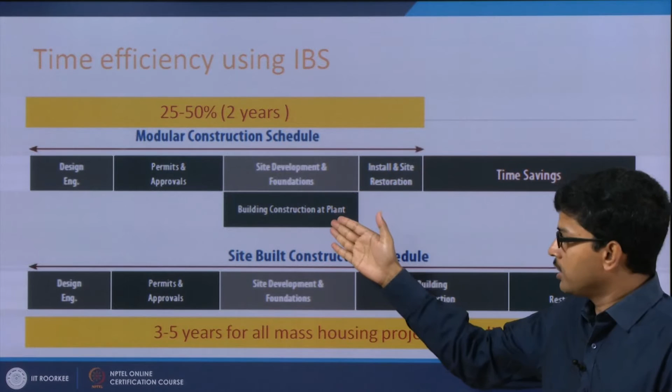This picture we saw last day also, that in any typical modular construction schedule, there is time saving because of the off-site construction activity. The site-built construction activity is reduced, and that construction is instead done at the plant. Now we will see the case study of how the industrialized building system in India is available and how much it can be applicable.

Before I show this example and case study, let me tell you that in government laboratories like CBRI, BMTPC or HUDCO, there were a lot of experiments. They developed, along with Hindustan Prefab Limited, very innovative building components and building materials, and those were tested and worked very nicely in some contexts. But here the examples we have taken will show how at a mass scale, in thousands of units, housing can be developed using these building components in the Indian context. That we will see in the next example.

The example we have taken is MHADA, Maharashtra Housing and Area Development Authority, and they have tied up with another private company, a manufacturer of innovative building materials called Shirke. This partnership between Shirke and MHADA takes up most of the affordable housing and housing for the poor across the whole state of Maharashtra, especially in Mumbai and major cities.

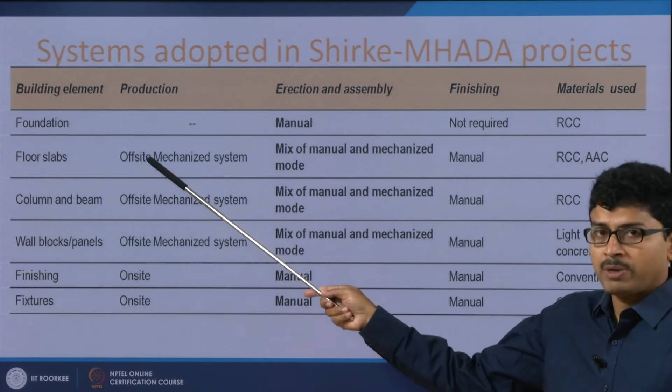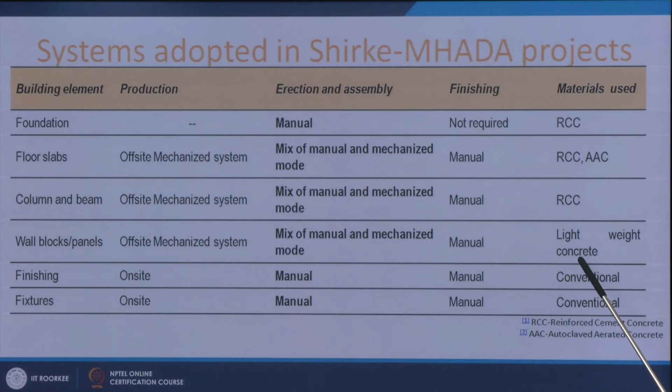The materials used for every component of the house, like foundation, floor slab, columns and beams, wall blocks, finishing and fixtures - for floor slab to wall blocks, they use an offsite mechanized system with blocks like reinforced cement concrete block or autoclaved aerated concrete block. Similarly, they use lightweight concrete or AAC block, whereas the foundation is done manually and RCC is done on site. The finishing and fixtures are also done on site.

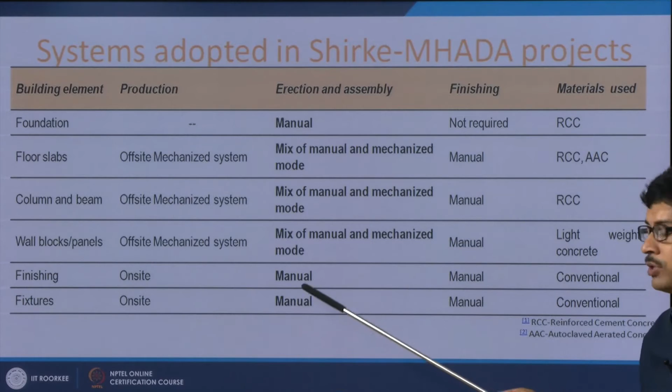So apart from floor slabs, column beams and wall blocks, the foundation and finishing and fixtures are done on site, using mostly a mix of manual and mechanized modes for floor slabs, column beam and wall blocks. Since foundation and finishing and fixtures take place on site, these three activities are essentially by and large a manual process.

To illustrate this, we have taken three different cases, different projects at different locations like Mankhurd, Pratiksha Nagar and Mazgaon in the city of Mumbai. One project will show construction under way, another will show a project completed in the last 5 years, and another will show one completed more than 20 years ago, so that we can understand its quality, durability and performance as a building and housing typology.

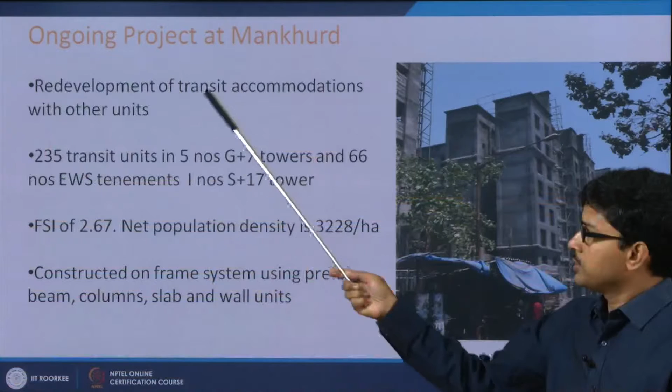This is an ongoing project at Mankhurd - basically a redevelopment of transit accommodations done by MHADA. It consists of 235 transit units in 5 numbers of G+7 buildings, and 66 EWS units with stilt plus 17 storeys high. They have used an FSI of 2.67, and the density is above 3000 per hectare.

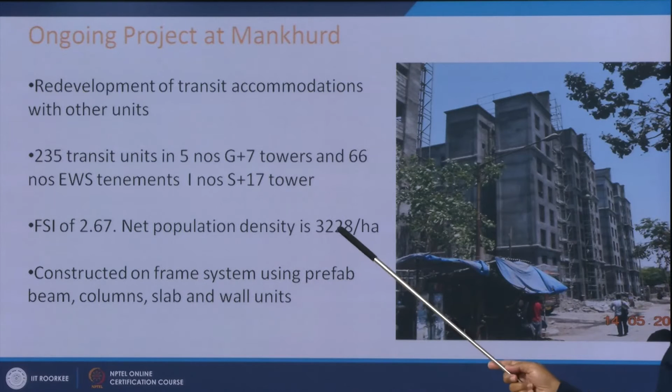Those coming from a planning or architecture background can understand that this density is quite high in the Indian context. In major cities, the net density calculated for a particular plot is typically around 1000 or 1500 maximum, but here they could achieve more than 3000.

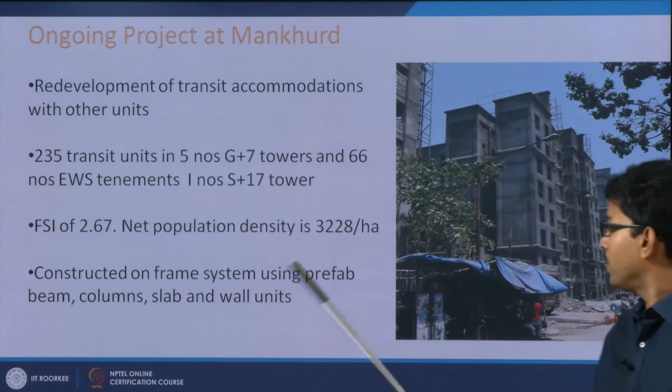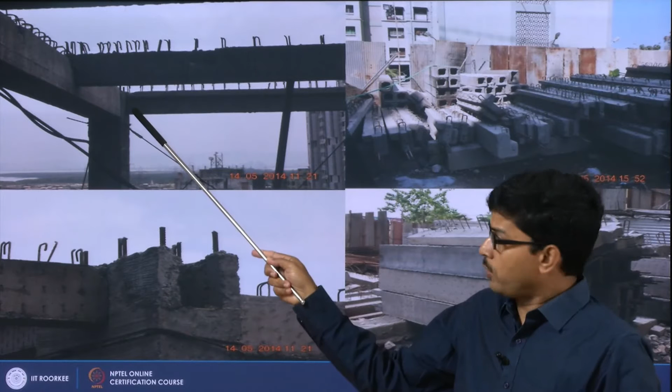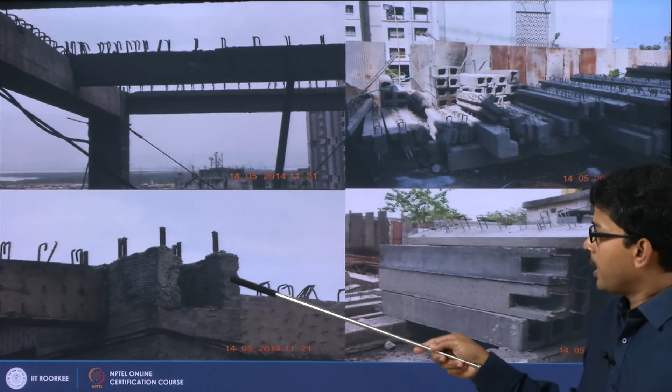They have constructed this on a frame system using prefab beam, column, slab and wall units. I will show how they have constructed it - you can see how the columns and beams are joined here. This is the typical joint of a column, showing the socket where a particular beam will be placed and fixed suitably.

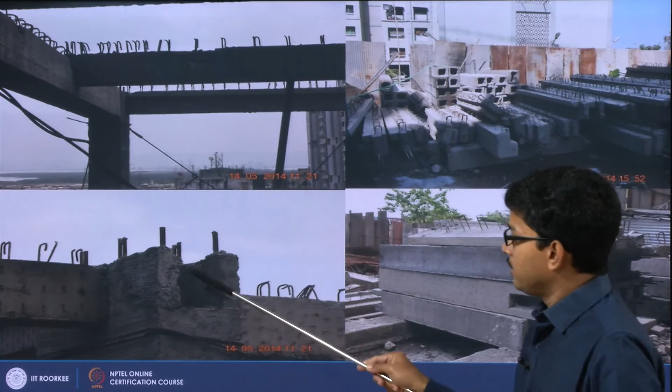These are pictures showing the column units. Column units have a hole throughout the column length, and it is inserted vertically like this, so that sockets are available for placing the beams. These are some of the beam elements, and over the beam you can see some anchoring elements where the slab element will be put and anchored. I will show the picture so you can understand well.

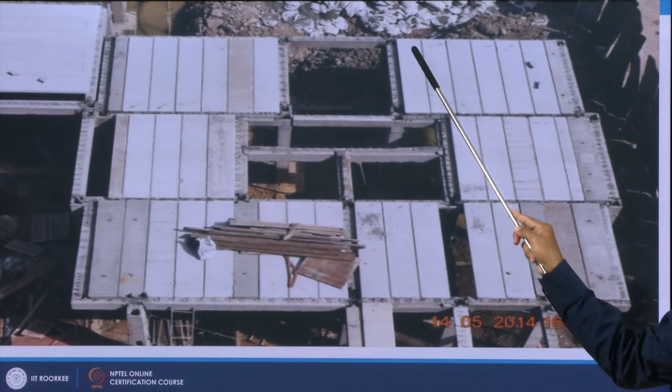After placement of the columns and beams like this, they place the slab element. All the slab elements are treated as independent prefabricated components - some consisting of RCC elements, some of cellular concrete block, which is autoclaved aerated concrete, completely manufactured in their own Shirke factory. They transport all these materials and put them in this manner. After placement of the slab component, they fill up the slab.

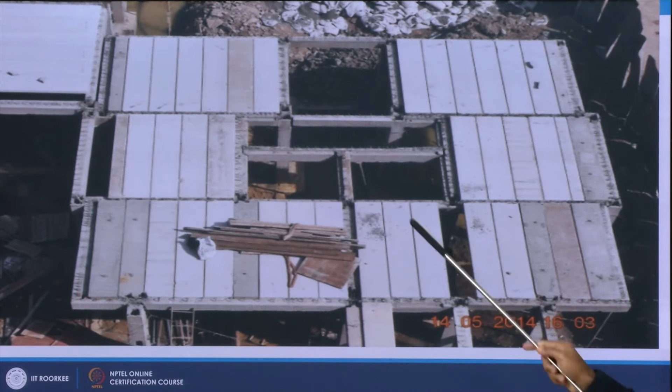They fill the slab over a screed concrete of 3 to 4 inches, and pour concrete into the holes of the column. So the whole column, beam and slab become fixed and more stable, and all the individual components become one integrated, strong component as a whole.

After putting the screed concrete over the slab, it becomes a complete strong floor. The whole process of placing columns, beams, slabs and screed concrete takes not more than 8 to 10 days, as I learned from field visits conducted in the last 1 or 2 years at various MHADA housing project sites. So this floor-to-floor cycle takes not more than 8 to 10 days, though it can take a little longer depending on weather, but technically it should not take more than 8 to 10 days.

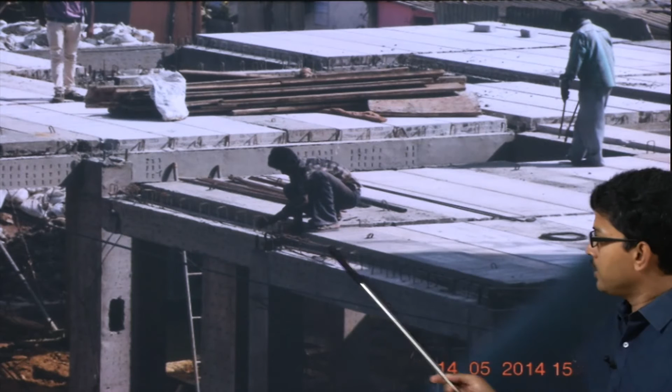So, here you can see how a manual lever is used for fine tuning of the slab component and anchoring the slab component with the anchors and the stirrups left over the beam component. After this fine tuning of the slab component, the screed concrete will be put. You can see the typical pictures of the slab component.

Every slab component has grooves like that, so that after placement of the slab component, it can act like one solid unified component as a slab, and so that it also binds well, it is locked well with each other like this. This is the picture of the whole floor, a typical floor.

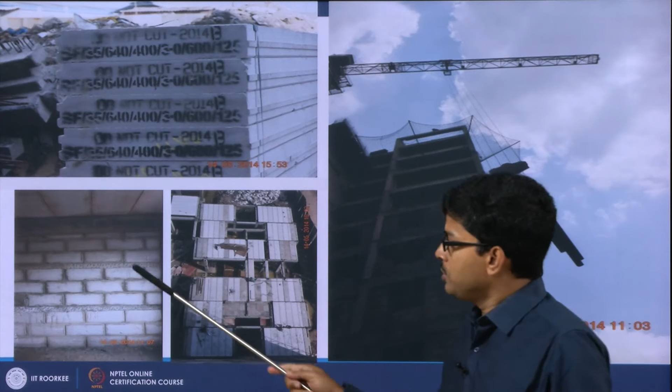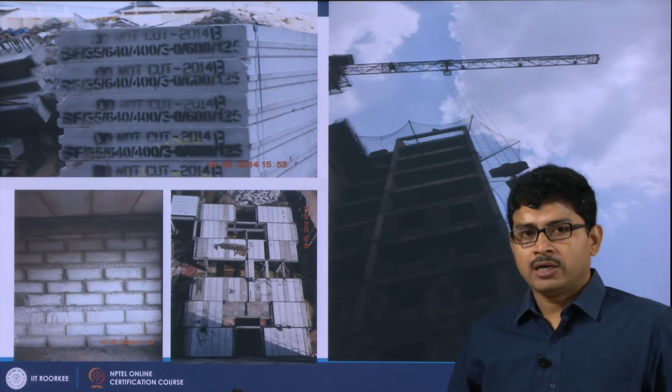This is how they are lifting any prefabricated component using cranes, and this is a typical picture of a wall component where they are using the AAC block, which we call a lightweight block, as a wall component. Also they use the concrete binder so that it becomes stronger and unified, and these blocks are very lightweight, a single person can carry them,

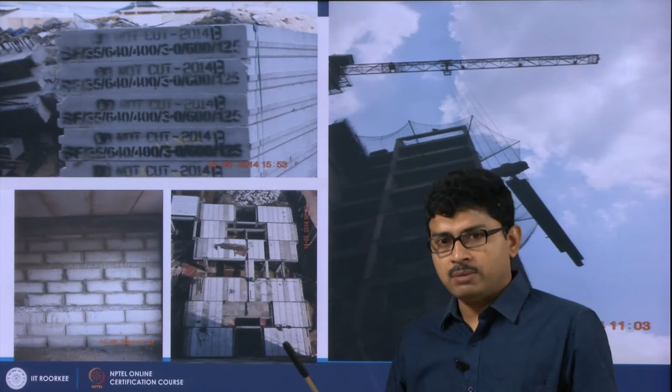and it is also very soft, so that someone can make a groove, or break it and use it like a common brick, but it is manufactured in a standardized dimension, and practically you do not need to cut AAC blocks too many times, so that you reduce the time requirement for the project construction.

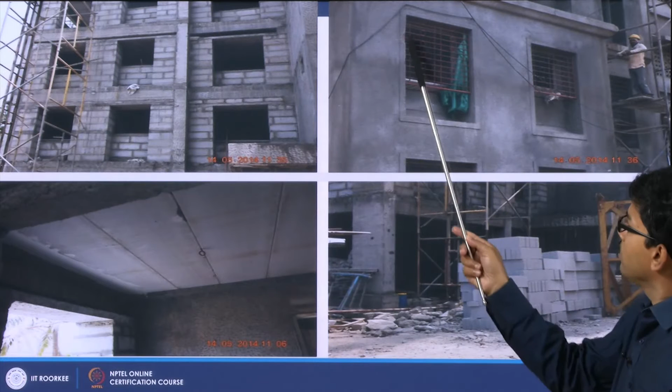Now, in this picture you can see some of the AAC blocks stacked at this site. These are the window blocks. These window blocks are also prefabricated, sometimes at the factory, sometimes at the site, and placed like that. And these are the AAC block walls, how they look from the outside, and you can see the slab component. The photograph is taken at the floor level, so that you can understand the joinery and the arrangement for the ceiling fan kept here.

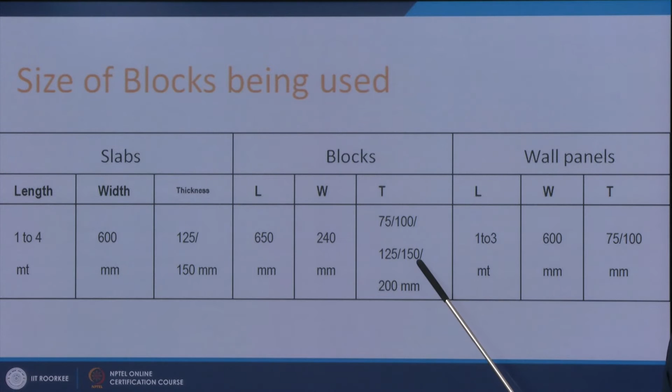So, they use the slabs, blocks and wall panels in this size. Almost 600 millimeter is the standard module size they use, and for the blocks they use a 4 inch, 3 inch, 5 inch or 6 inch module. The length can be 1 to 4 meter for the slabs, 650 for the wall blocks, and for wall panels it is 1 to 3 meter. So, keeping the thickness as 3 to 5 inch and the width as 2 feet, they can go for 1 to 4 meter and 3 meter.

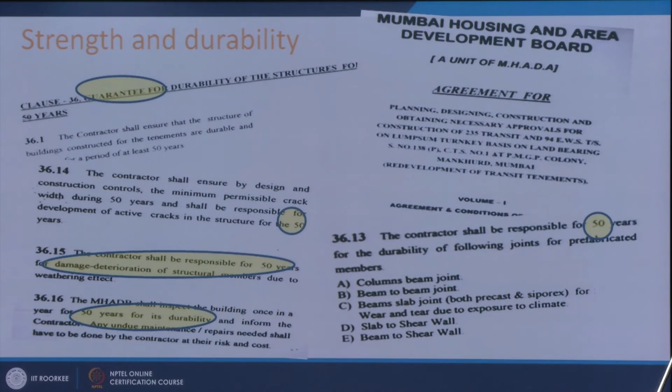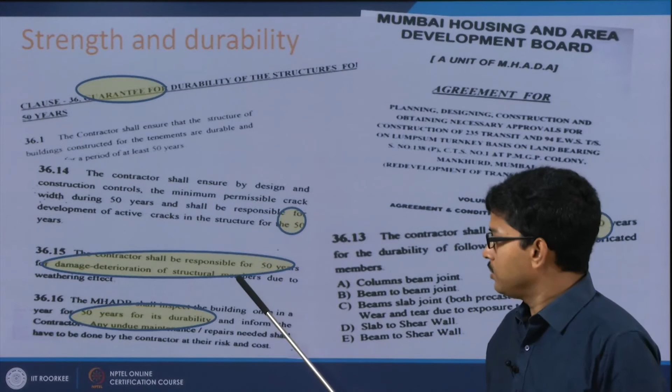Now, let us talk about its strength and durability. The whole structure is designed to give a life cycle of at least 50 years for durability and strength against all possible loads in the building, and they have vetted the design with the help of IIT Bombay. These are some of the clauses in the contract between the developer or manufacturer and the government housing board authority, where they have given a guarantee of durability and strength for at least 50 years. And it is still working for more than 20 years. This particular project was under construction.

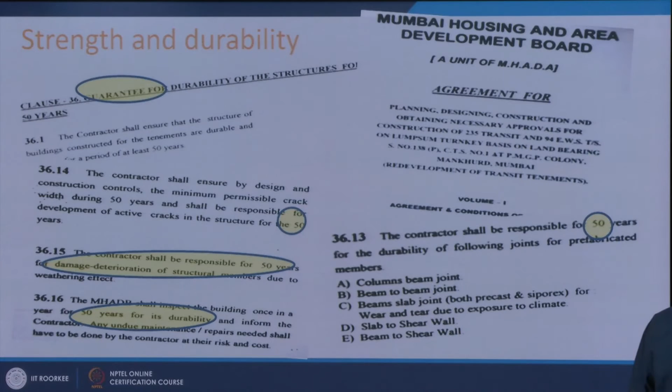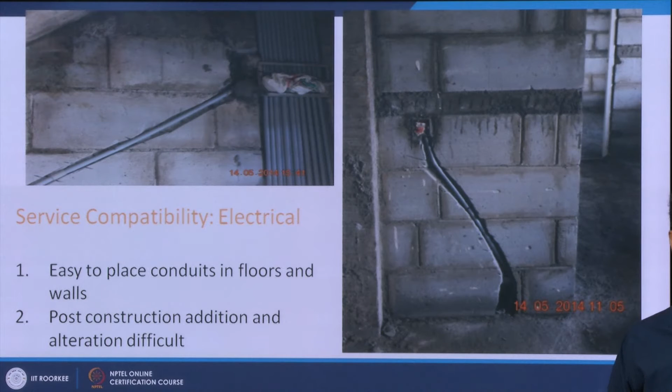Now, this is the arrangement of how they put the conduits for the electrical pipelines. Usually in normal RCC construction we place the electrical conduits in the roof slab during casting, but here, during the screed concreting over the prefabricated slab component, they take the conduits in the screed concrete, and from there a conduit goes up to the switchboard level, whereas in conventional construction it is taken from the ceiling. So, that is the difference.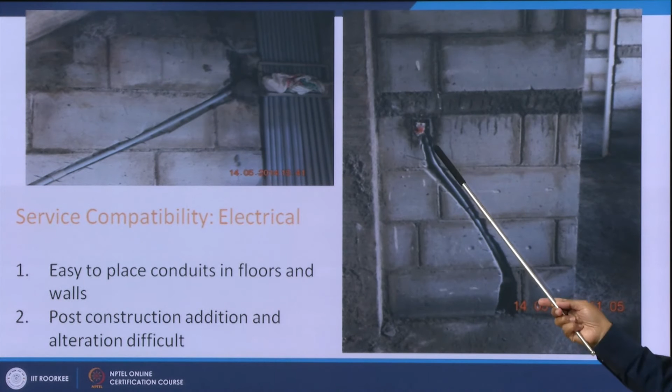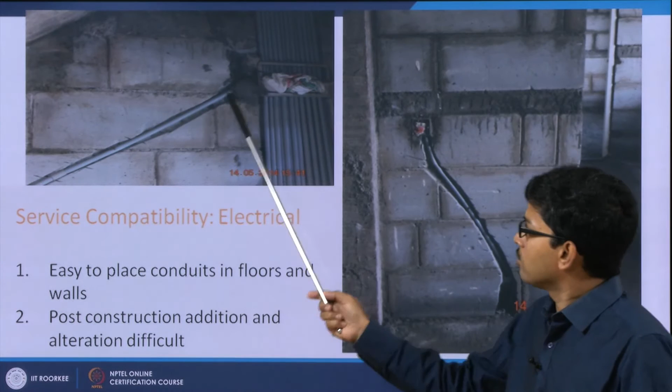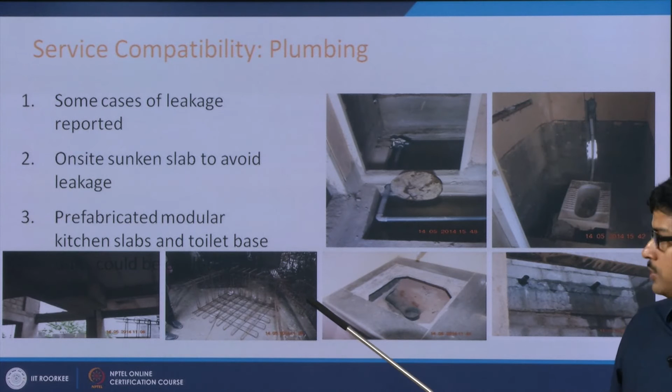Another point is that it is very easily cut by even semi-skilled labor, so that they can make space for the conduit like this. These are the exposed conduits. These are some pictures showing how the plumbing arrangements and outlets are done, and some drop slabs which are done in situ. Those could be a next stage of improvement, but these are the areas where it is working very nicely as a product, as a design.

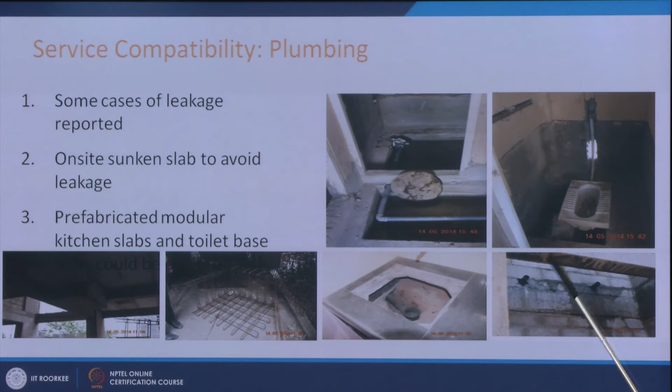These are the pictures which are under construction. Now, we will see some of the projects which are already constructed to appraise or to assess their efficacy against the performance. Now, this project, the New Hindu Mills project, is in Mazgaon.

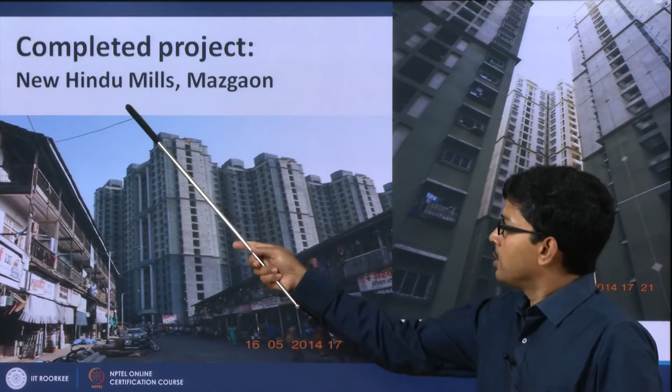Now, in Mumbai, you know that there are many mill lands. So, the authority or the government of Maharashtra took a policy to use those mill lands for affordable housing projects. So, this is one of the biggest mill land housing called New Hindu Mills. Basically, it is a combination of a few mill land housing, where they have placed also the original staff of the mills, some transit accommodation, and a few EWS and LIG population.

You can see the adjoining area is full of a kind of slum-like situation, and this is the housing project which we are discussing. So far 18 housing projects in the mill land were already executed, more than 10,000 units, till 2014 when we took this study. So, the New Hindu Mill project is the largest, having more than 5,000 units. It is one of the biggest projects.

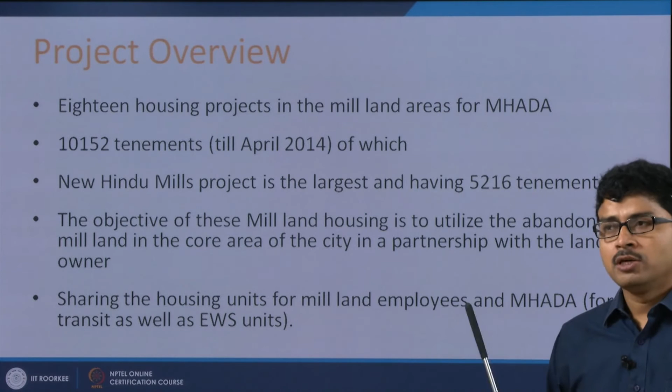So, the objective of this mill land housing is to utilize the abandoned mill land in the core area of the city in a partnership with the landowner, and sharing of the housing units for mill land employees and MHADA for transit as well as EWS units, as I told. So, for redevelopment of the other projects, other slums, some transit houses will be required. So, those transit houses will be accommodated in this project. That was one of the objectives.

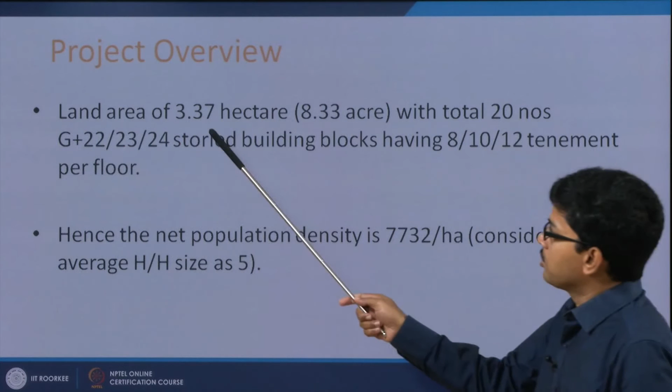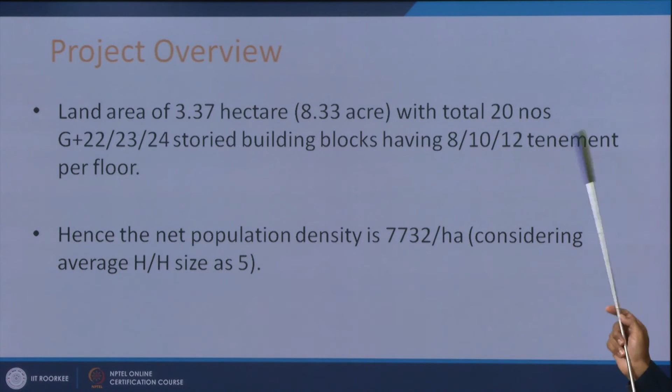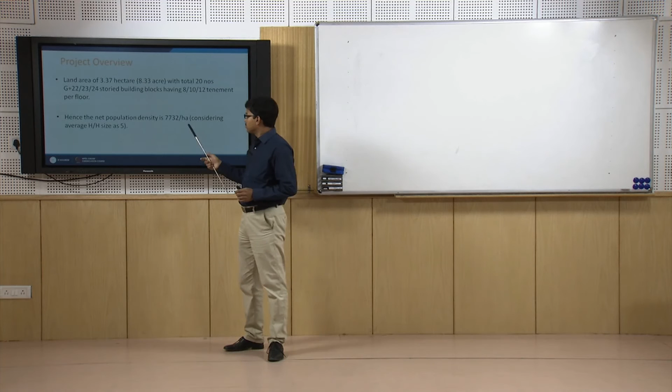So you can see the land area was more than 3 hectares, 3.37 hectares, and it was full of G plus 22, 23, 24 storied blocks having 8 to 12 tenements per floor, and you can see the density. It is a very high density project with a compact development, but with this density at least the housing units are affordable for the poor, the lower income group or economically weaker section. Otherwise it is not affordable.

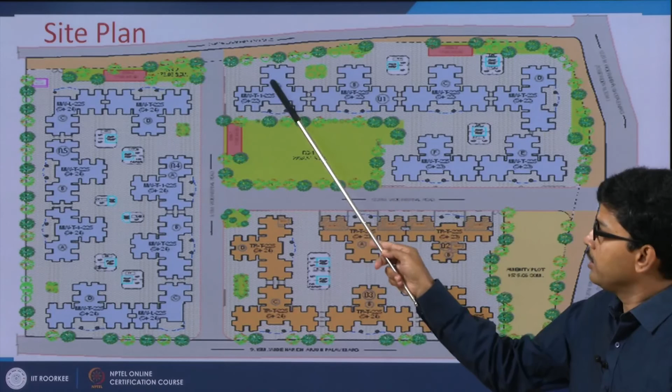You can see the layout plan. In the layout plan, the building blocks are joined together in such a way that they make internal courtyards for enough light and ventilation, and you can see the typical building unit is repetitive, because we talked last day also that the whole industrialized or prefabricated process runs on standardized design, standardized modules. So each housing unit consists of a standardized module. We will see one such module in detail in the next slide.

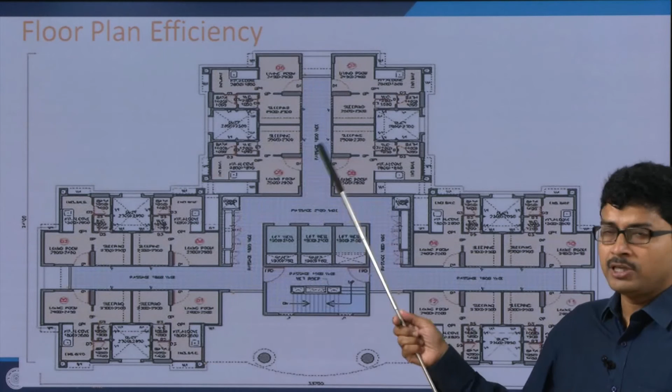So this is a standardized module of a typical building block. It consists of 12 units. This is one unit consisting of one multi-purpose room or living room, one bedroom, one WC and one bath area and one kitchenette with some storage area, and this is the common core with staircase and lift block, whereas these are the common lobbies to provide access to each and every unit. So this is the standardized module which they use.

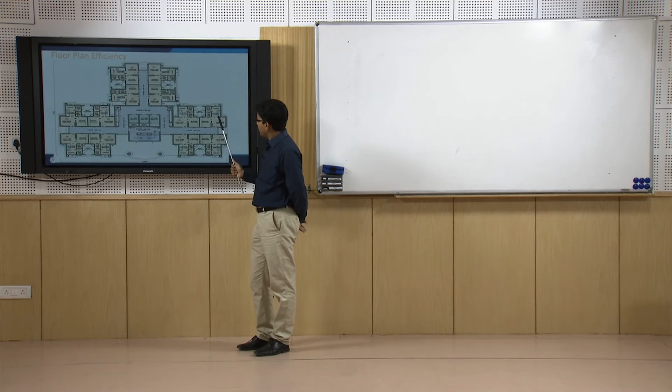Out of this module, components like the lift shaft, lift core and the staircase core are done in situ using RCC basically, and some elements like bigger columns are also RCC, but apart from that most of the elements are done with prefabricated wall blocks and prefabricated components.

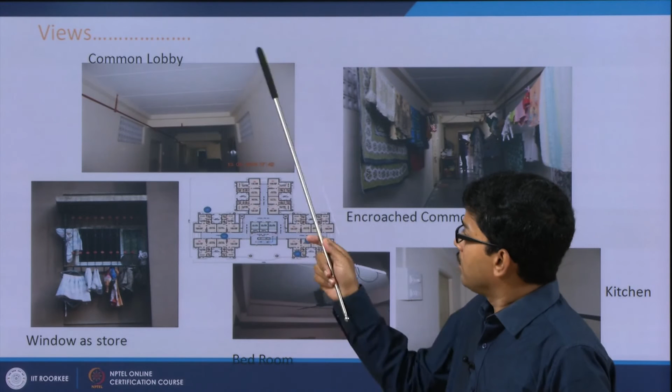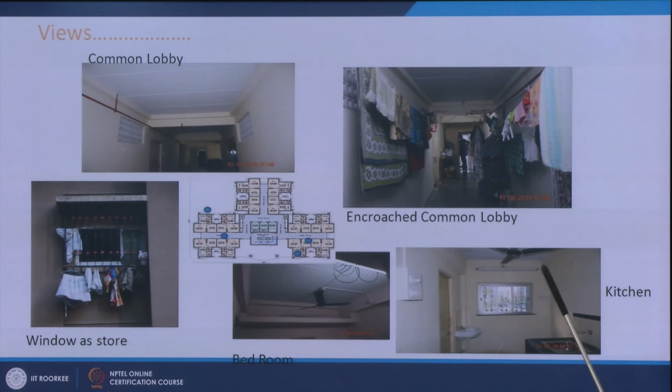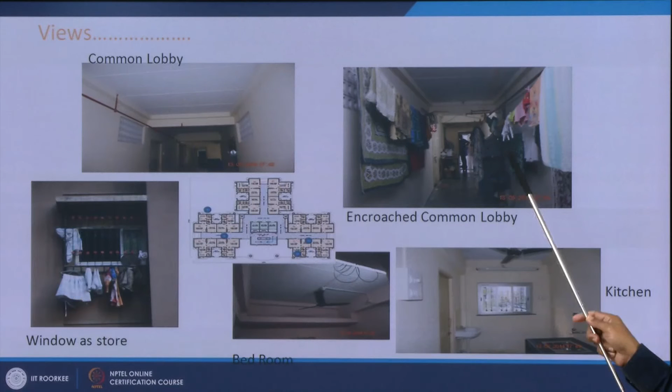This is the picture of a finished floor, where you can see the placement of the slab component from the bottom. It is painted in colors, and this is the picture of the typical kitchen, where you can see the kitchen slab and the slab component. Only one thing: since this particular design does not have any balcony as such, they are using the windows for their day-to-day storage, or in a few cases we have also found that they have used the lobbies for keeping their day-to-day things.

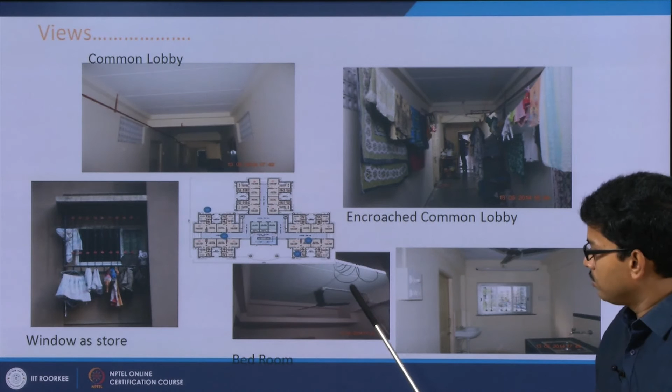And this is the picture taken from inside, where you can see the internal arrangement of the slabs and how they have taken the electrical pipelines, which are basically exposed. So these are the variations and the outcome of the project. This is the typical unit plan having one living room, one bedroom, kitchen, WC and one bath.

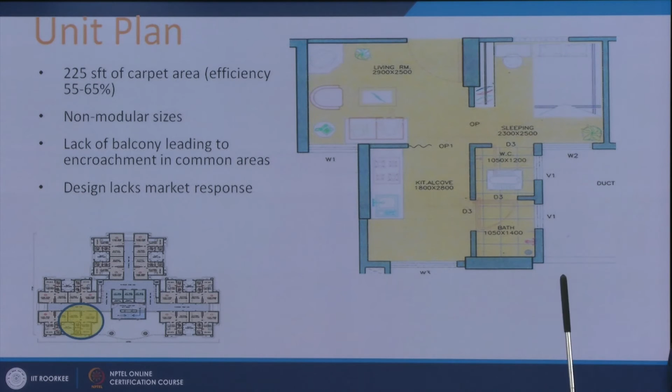Now, this is a very compact design within 225 square feet of carpet area. The only thing is that it could have accommodated another very small balcony, so that people could use it in a multi-purpose way. Other than that, it is a very nice design to generate affordable houses within this price and within this much time.

So these are the general views of the project. You can see it is a huge project. This is the view from the inside courtyard of the project.

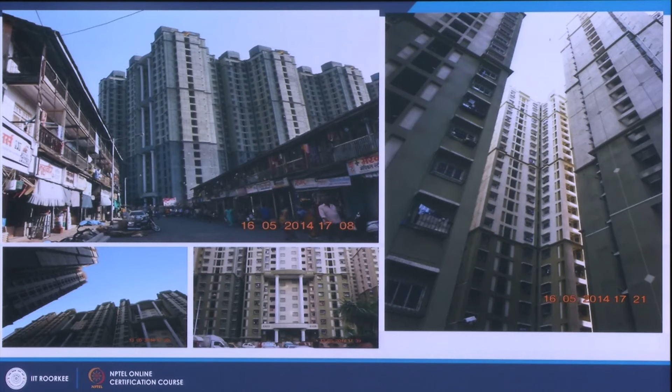So, the overall inference from this particular set of projects is that the superstructure has been found structurally safe against weather effects and all kinds of load features like live load, dead loads and seismic load, everything. The prefabricated elements like wall and slab blocks have used the right kind of materials considering weight, cost, energy. However, they need to be customized units for accommodating electrical and plumbing pipes.

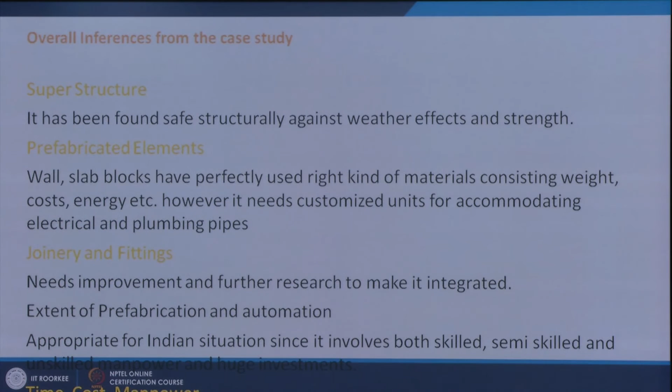When we discussed at the site, we understood that some of the units could be integrated to have the plumbing and electrical installation, so that during construction somebody does not have to make the grooves separately. Joinery and fittings are the areas where further improvement can be done, but as of now the projects are functioning absolutely in good condition. It is a very viable and feasible option using frame construction in the Indian context.

Now let us see a comparative cost of the projects. To compare, we have taken other projects. We took Sukho Brishti, which is being developed by Shapoorji Pallonji in Kolkata as lower income group housing, and we have taken Subho Griha, which is developed by Tata Housing, and also we have taken New Hindu Mills Housing. We have taken the cost component from their websites.

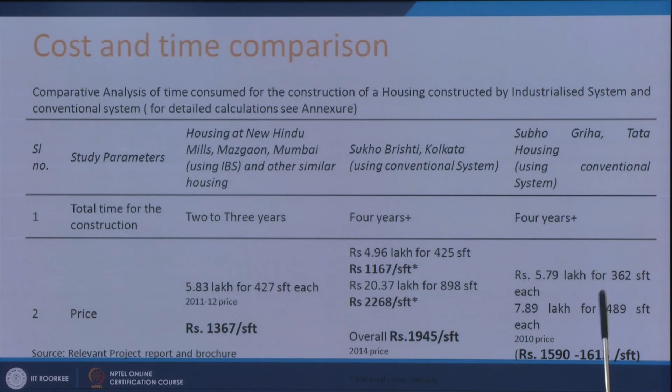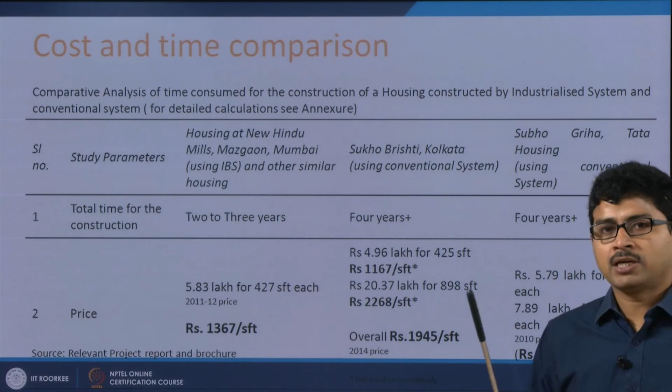So you can see the cost component is much lower than the other conventionally constructed projects, almost 30 to 40% cost savings are there. And if you see the time, Sukho Brishti and Subho Griha are taking more than 4 years, but in this case the New Hindu Mills Housing has taken 2 to 3 years, because this project is a very large project. Otherwise in other projects they have taken 1.5 years or 2 years or even less than that.

So the median duration of the project is 1.5 years for a mid-size project of say 500 units or so, but here the project was so big, 5,000 units, that it took 2 to 3 years. Still it is less than the other conventional projects.

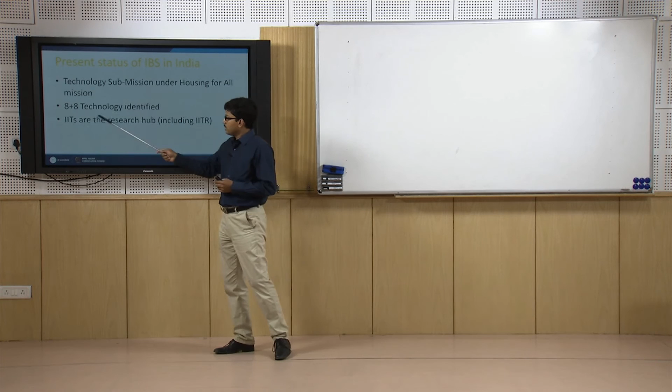So now we come to the present status of India. In India now we have the Pradhan Mantri Awas Yojana by the Government of India. Next day we will discuss the Pradhan Mantri Awas Yojana in detail, and under the Pradhan Mantri Awas Yojana one technology sub-mission is conceptualized. In this technology sub-mission they have identified a total of 16 technologies.

IITs and NITs are acting as a research hub for the technology sub-mission, because not all the technologies they identified are tested in the field, except 1 or 2 which I showed today. That is why it is under experimentation.

So let us summarize the discussion we had today before I conclude. Today we discussed some examples of the industrialized building system in Indian conditions. We said that in India after independence there was a lot of experimentation in materials and building systems by government organizations and NGOs, but those were basically focused on a particular building component or material.

But today we showed another example where a government agency, in partnership with a private developer, is delivering a complete project using totally prefabricated units, using prefabricated columns, beams, slab components and wall block components, so that the project is completed within 2 years for a mid-size mass housing project. The other conventionally constructed projects are taking 4 to 5 years, but here they are taking 2 years median, and the project cost is also less than the other projects.